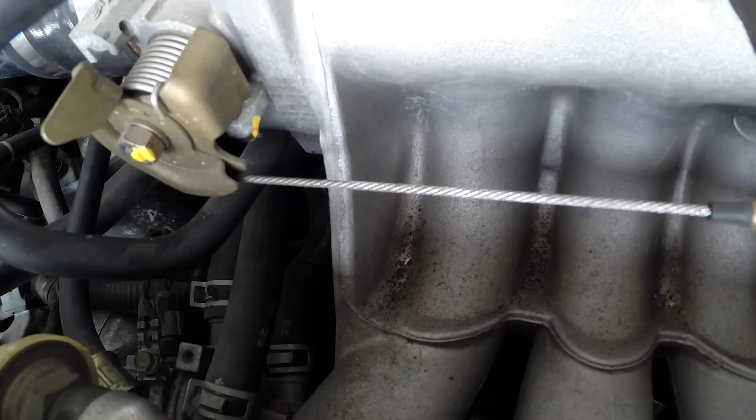In the last decade, over 95% of new vehicles have switched from traditional throttle cables to advanced drive-by-wire systems. Instead of a simple mechanical connection, your accelerator pedal now talks to your engine through a small but mighty device called the Accelerator Pedal Position sensor. Today, we're zoning in on this critical sensor that's crucial for your safety and engine's performance.

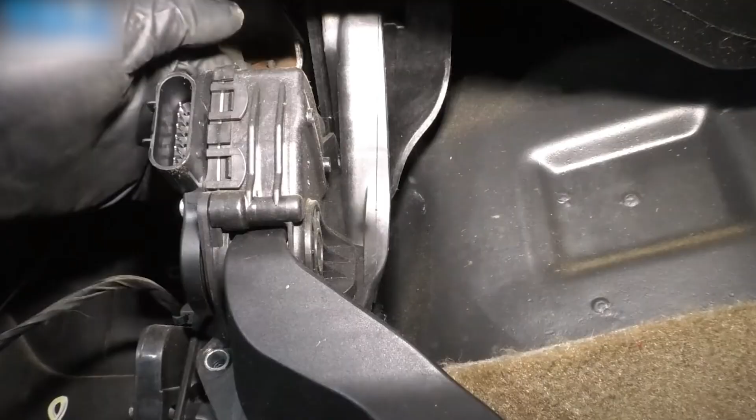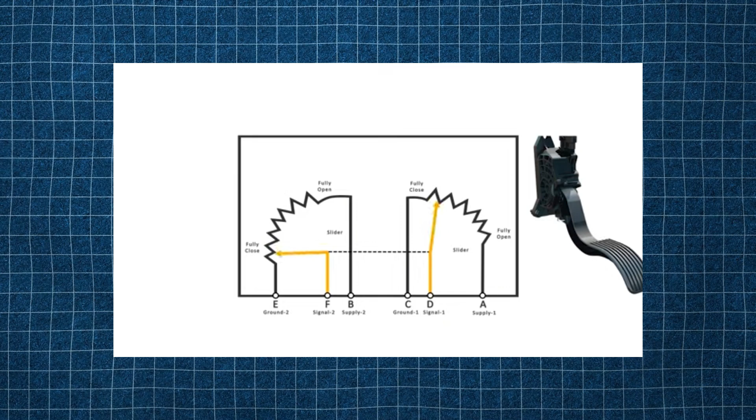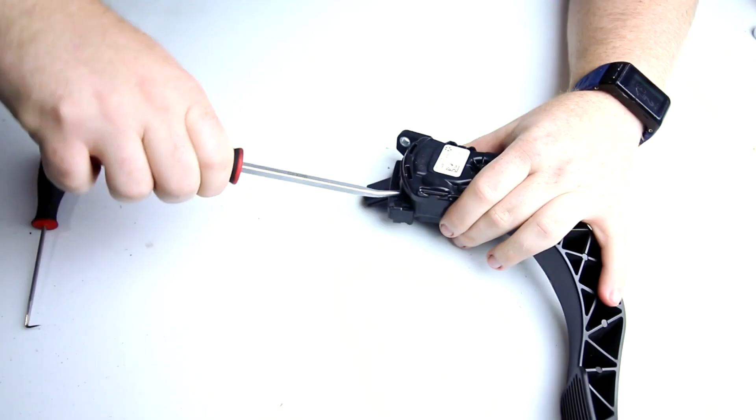What is the Accelerator Pedal Position sensor? The Accelerator Pedal Position sensor is a compact electronic component typically mounted on or near the accelerator pedal assembly. It contains internal circuits and sensors that detect the position and movement of the pedal. Built with precision electronics, it often includes one or more variable resistors, magnetic sensors, or Hall effect sensors inside a sealed housing designed to resist dust, moisture, and vibration. Most designs feature a multi-pin connector for electrical communication with the vehicle's control modules.

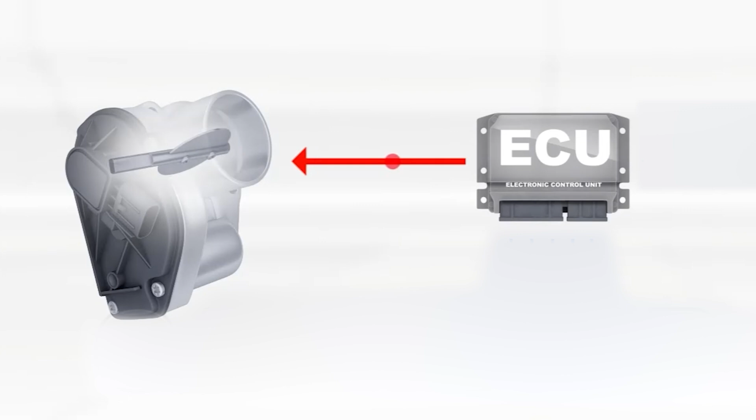What does the pedal position sensor do? The accelerator pedal position sensor measures how far the accelerator pedal is pressed and sends that information to the vehicle's electronic control unit, ECU. The ECU uses this data to adjust the throttle opening and control both engine power and fuel delivery, ensuring the right amount of air and fuel are supplied based on how much you want to accelerate.

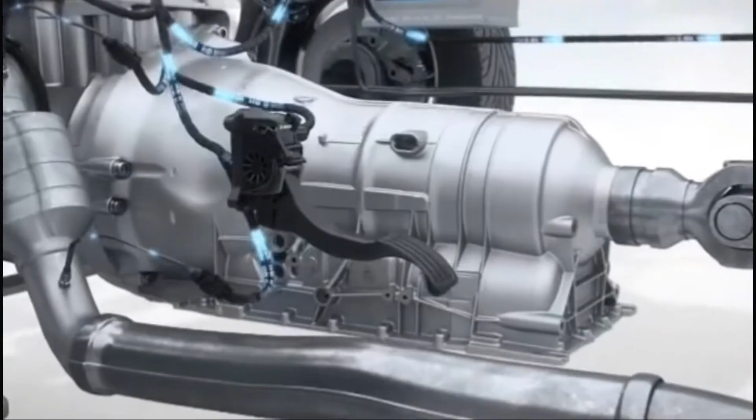But here's the kicker. When the accelerator pedal position sensor starts to fail, it might send inaccurate signals to your engine control unit, causing the engine to struggle to run properly or not run at all. Stick with me until the end to learn all the symptoms of a failing APP sensor and what to do.

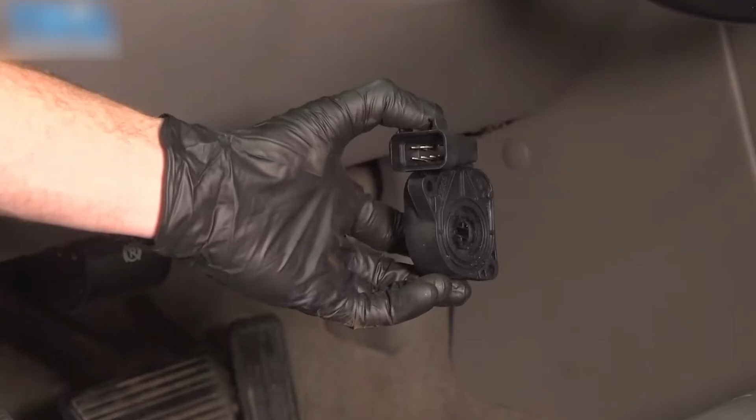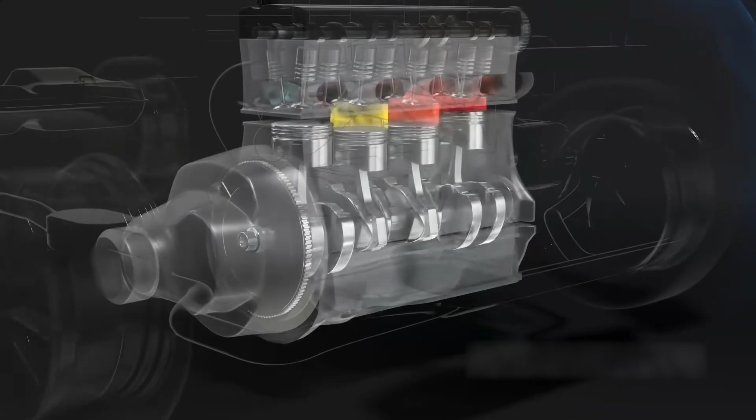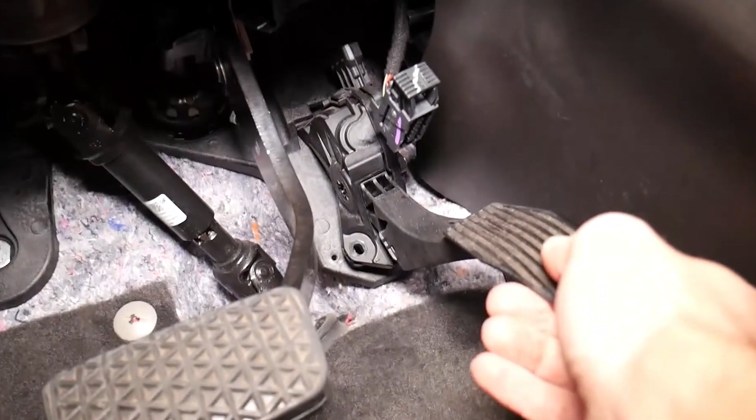1. Unresponsive acceleration. You press the pedal, but nothing happens, or there's a noticeable delay. An unresponsive accelerator is one of the most obvious signs of a failing pedal position sensor. The engine control unit, ECU, depends on precise readings from the sensor. If the signal is weak, erratic, or missing, the engine struggles to respond appropriately. In many cases, you might experience sudden hesitation before the car finally accelerates. This isn't just annoying, it can also be dangerous, especially when overtaking, merging into traffic, or crossing intersections. Always take delayed pedal response seriously.

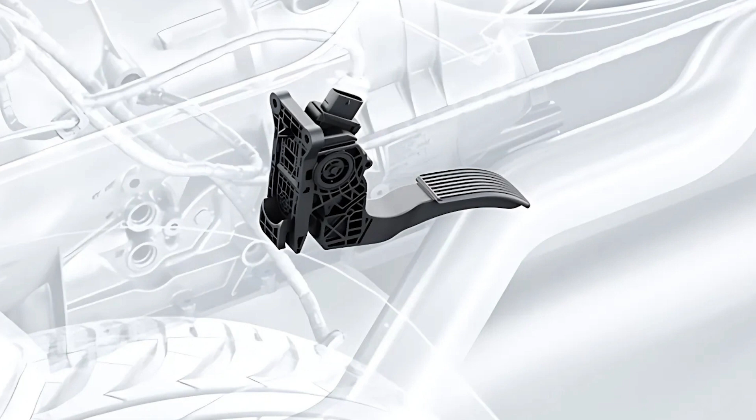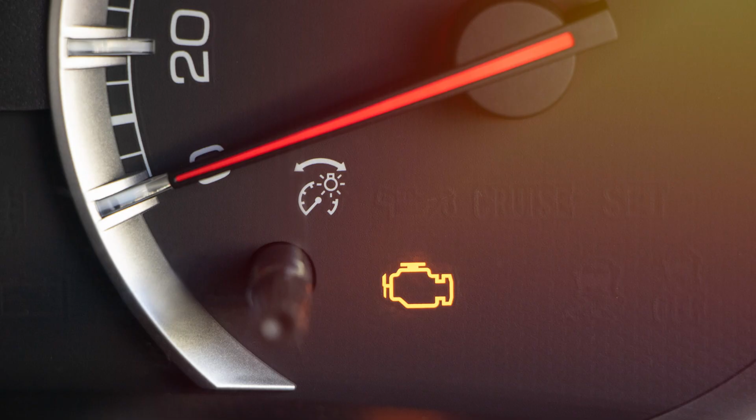2. Check engine light coming on. When something goes wrong electronically, the car's first line of defense is triggering the check engine light. A bad accelerator pedal position sensor often throws a code, alerting you that something isn't right under the hood. The specific trouble codes related to the APP sensor usually are P0120, throttle pedal position sensor A circuit malfunction, P0122, low voltage input, and P0123, high voltage input. Even if the car seems drivable, ignoring the warning light could lead to more expensive repairs down the road. Always check the codes with an OBD2 scanner.

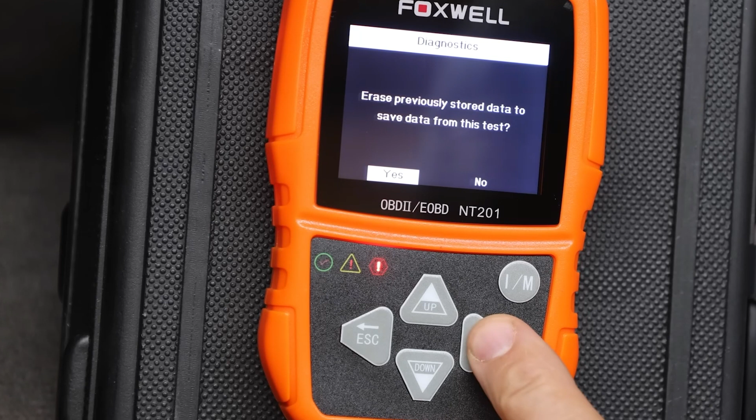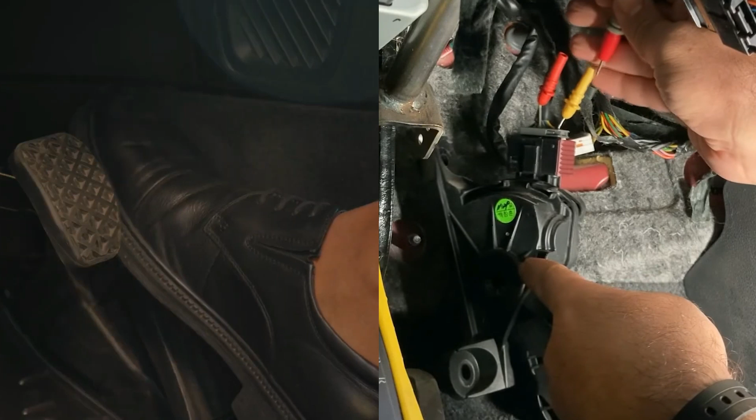3. No throttle response at all. In severe cases, the accelerator pedal may completely stop working. No matter how hard you press, the car doesn't move or only revs weakly in neutral, creating a potentially dangerous situation, especially in traffic or on highways. Complete failure usually means the sensor is either dead or its wiring has failed. This is an urgent problem that can leave you stranded, so it's important to have the car inspected immediately if you experience zero throttle response.

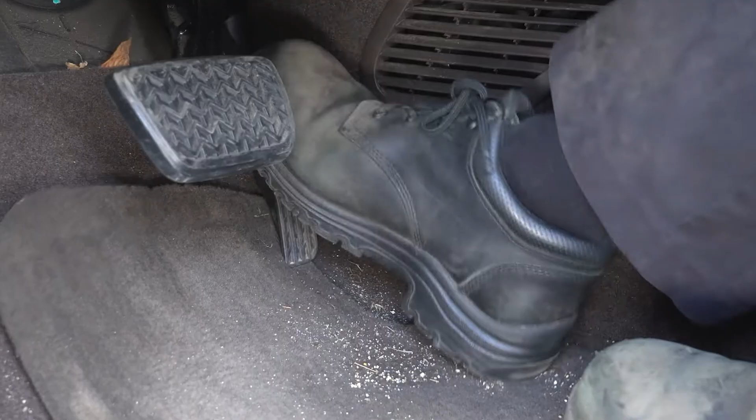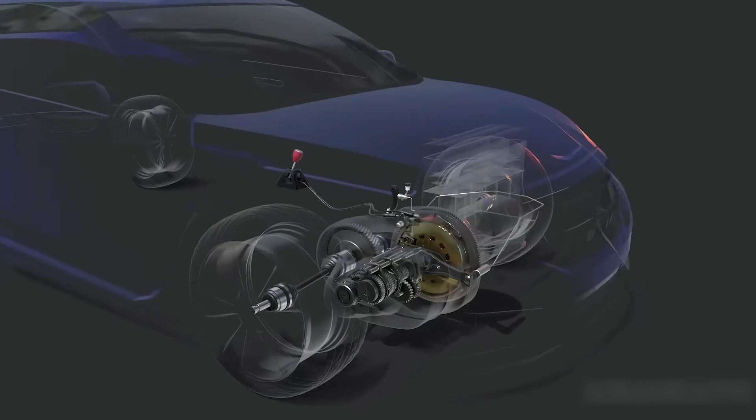4. Car goes into limp mode. Modern vehicles are equipped with protective features that activate when something critical fails. One such response is limp mode, triggered if the accelerator pedal position, APP sensor fails severely. Limp mode is designed to limit engine power, throttle response, and speed to reduce the risk of further mechanical or electronic damage. In limp mode, your car might not go faster than 20 to 30 miles per hour, and engine power will feel extremely limited. The throttle feels sluggish or almost unresponsive, and transmission shifts may also be restricted to protect the drivetrain. It's your vehicle's way of telling you that something is seriously wrong and needs immediate attention.

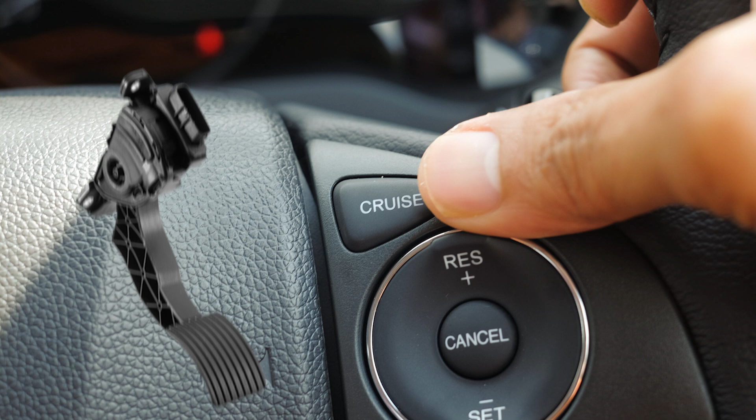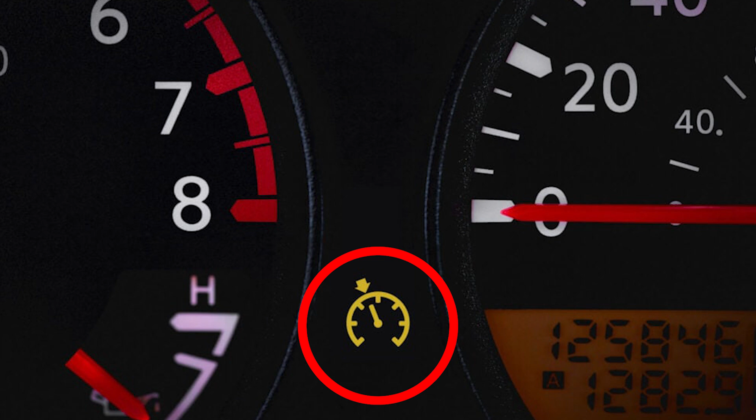5. Cruise control not working. Since cruise control relies on the APP sensor to maintain speed, a faulty sensor can disable the system entirely. You might press the set button, but the car won't hold speed because the ECU can't trust the pedal position data. Some vehicles may even flash a warning like cruise control disabled when the APP sensor fails. If your cruise control suddenly stops working, this sensor could be the reason.

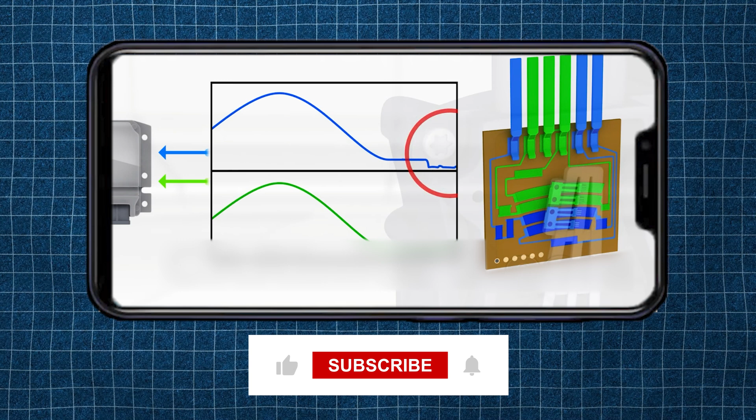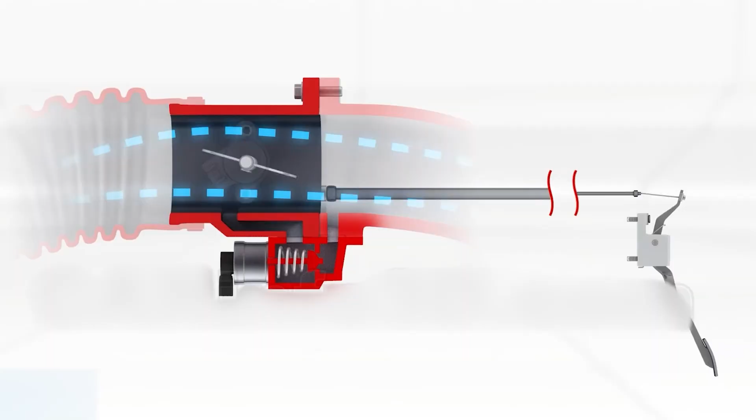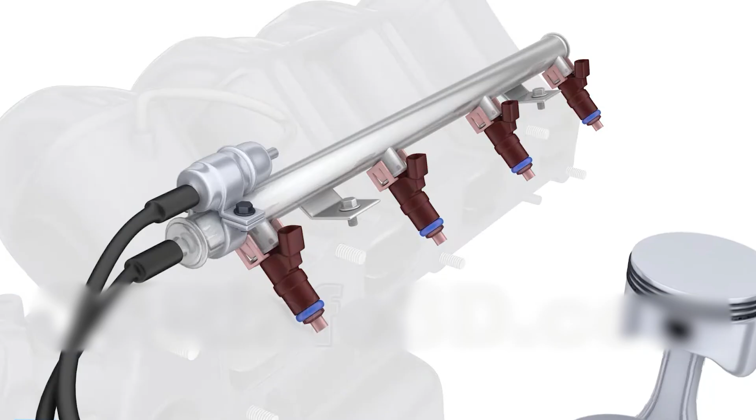6. Poor fuel economy. Since the APP sensor helps control fuel delivery, a bad sensor can cause your engine to burn more fuel than necessary. When the sensor provides faulty information, your ECU might think you're asking for more power than you are, leading to excess fuel injection. More fuel consumption means you'll visit the gas station more often and spend more money. Poor sensor feedback can trick your car into running rich even when it's not necessary, hurting both your wallet and the environment.

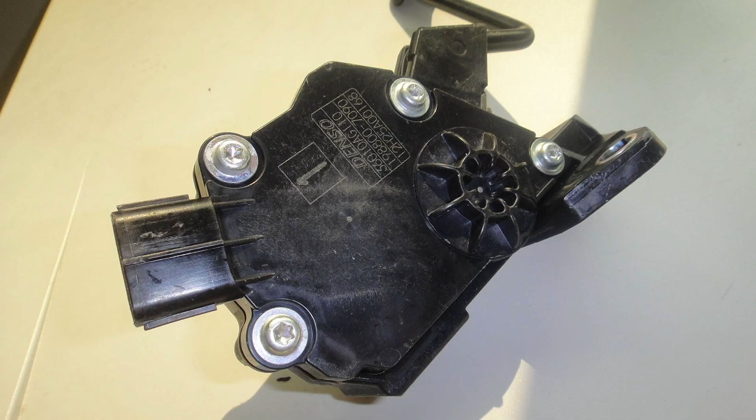7. Jerky acceleration. Smooth and steady acceleration is what we expect when driving. But a faulty pedal position sensor can cause your car to surge or jerk without warning.

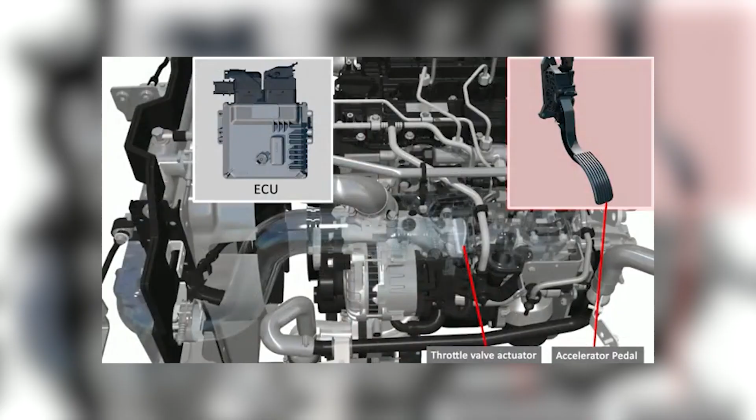Instead of a linear increase in speed, the car may speed up in bursts, even with consistent pedal pressure. This happens because the sensor's voltage output is inconsistent, sending confusing signals to the ECU. The computer tries to interpret the wrong data, resulting in sudden engine power changes. It can feel like your car is lurching forward unpredictably.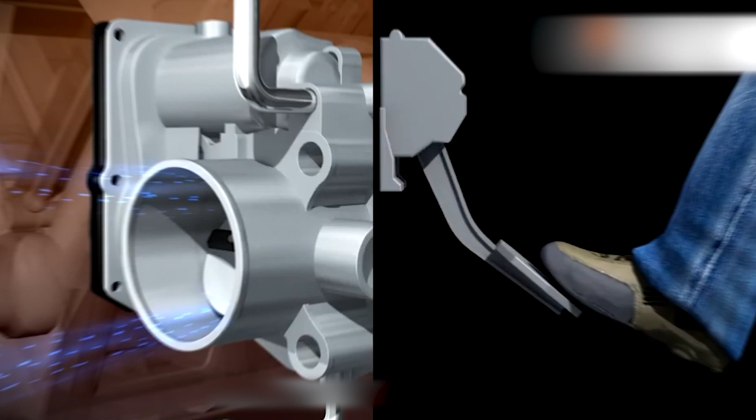8. Engine stalling. A bad accelerator pedal sensor can cause your engine to stall unexpectedly. Because the sensor helps regulate the air-fuel mixture via throttle input, incorrect readings can cause the engine to misfire or lose power completely. Sometimes, the engine might stall right after you press the gas pedal or while idling. This behavior is not only frustrating, but can leave you stranded if it happens at the wrong time. If you notice random stalls, the pedal sensor could be the hidden culprit.

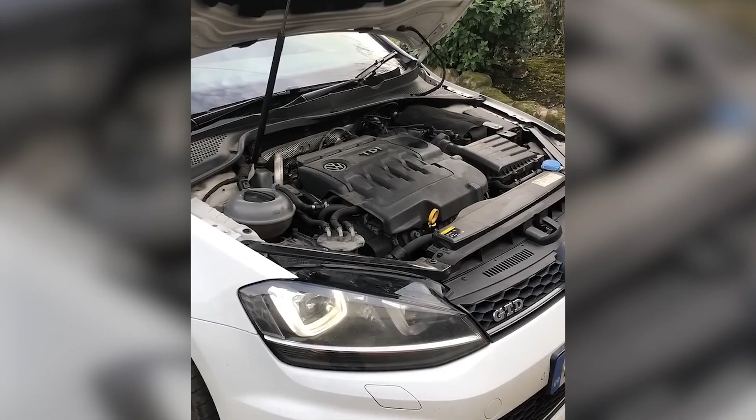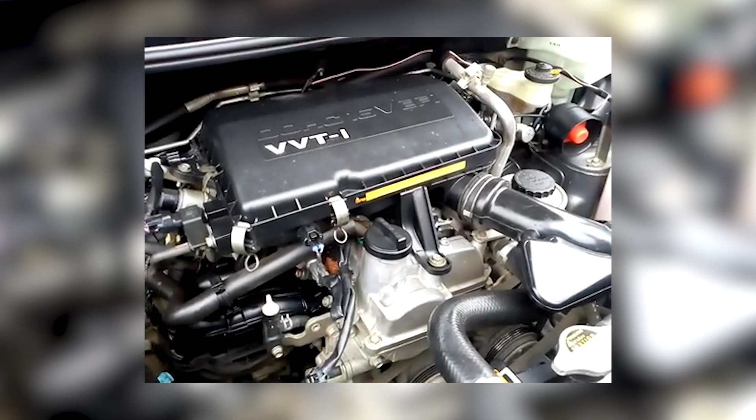9. Rough idling. When the accelerator pedal position sensor starts to fail, rough idling is a common side effect. You might notice the engine shaking or fluctuating when the car is stationary, such as at stoplights or in traffic. This happens because the ECU is receiving incorrect or inconsistent signals about throttle position, causing an unstable air-fuel mixture at idle. Rough idling may worsen over time and can lead to stalling if left unaddressed.

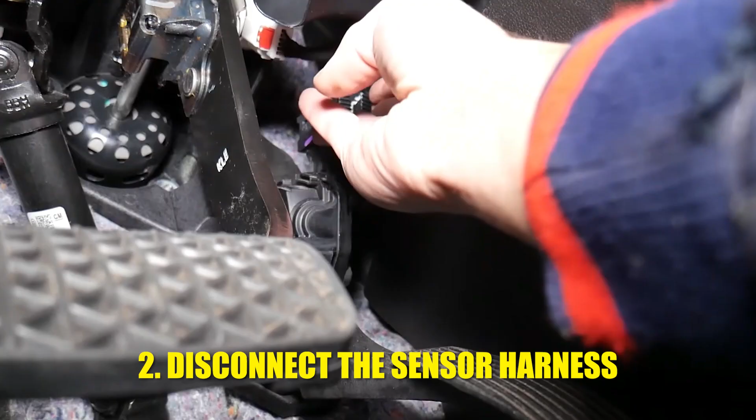How to test the accelerator pedal position sensor? Method 1. Using a multimeter. 1. Turn off the ignition and locate the accelerator pedal sensor connector. 2. Disconnect the sensor harness. 3. Set your multimeter to DC voltage. 4. Identify the sensor signal and ground wires using a wiring diagram. 5. Connect the multimeter's black lead to the ground wire and the red lead to the signal wire.

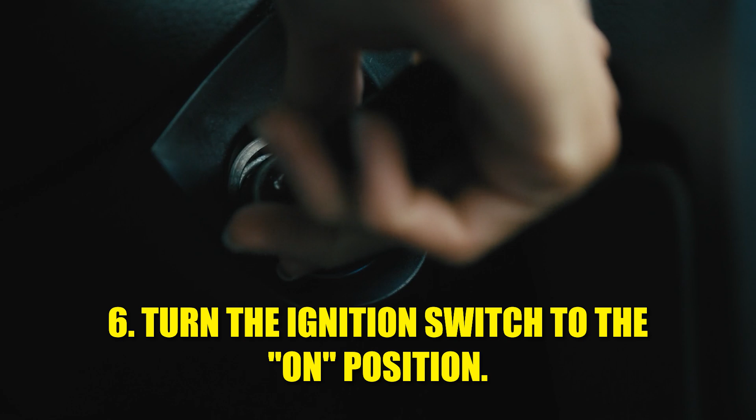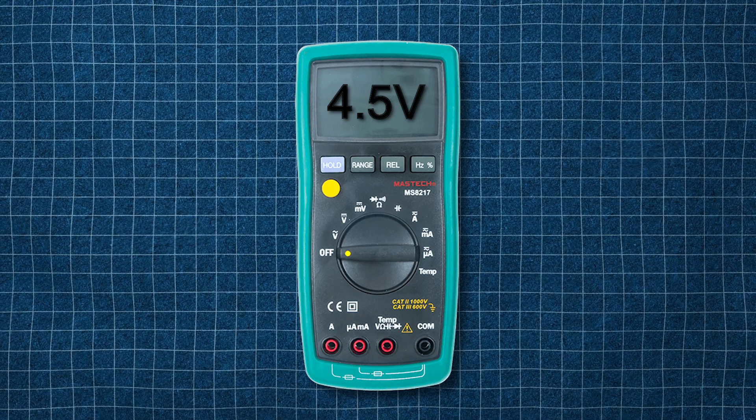6. Turn the ignition switch to the on position. Don't start the engine. 7. Slowly press the pedal and monitor the voltage. It should increase smoothly from about 0.5 volts to about 4.5 volts. Any sudden jumps, drops, or inconsistent readings indicate a faulty sensor.

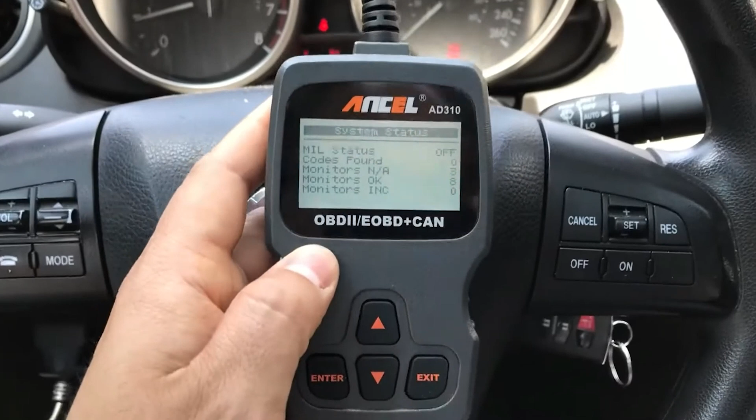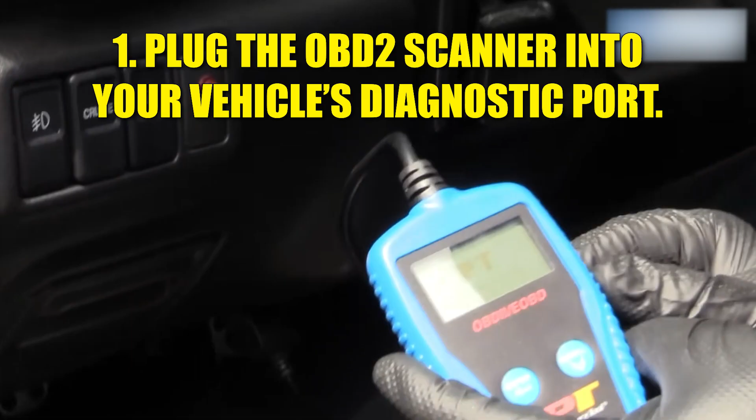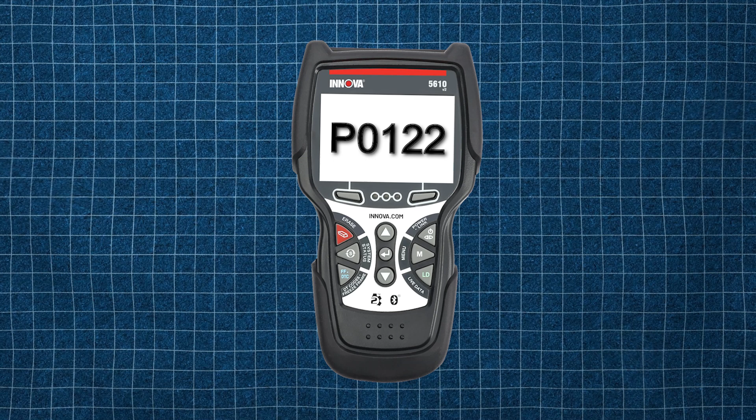Method 2. Using an OBD2 scanner. Using the OBD scanner, you will check for the live data and error codes. Below is the step-by-step process. 1. Plug the OBD2 scanner into your vehicle's diagnostic port. 2. Turn the ignition on without starting the engine. 3. Scan for trouble codes. The common APS-related trouble codes are P0120, P0122, P0123.

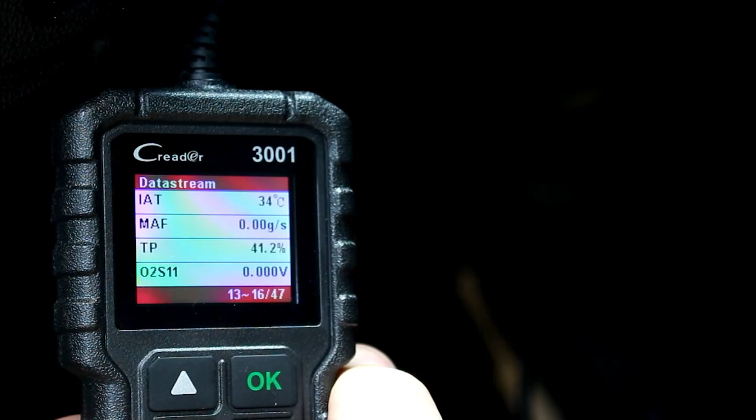4. Access the throttle or accelerator pedal position live data stream. 5. Gradually press the accelerator pedal while observing the data. The percentage value should increase smoothly from 0% to 100%. Jerky or inconsistent changes suggest a problem with the sensor.

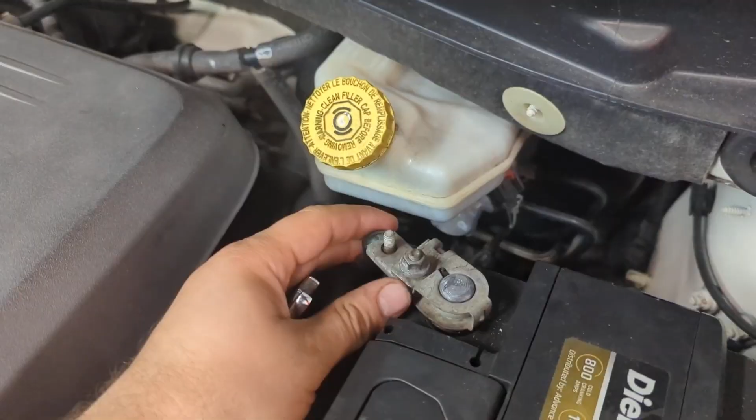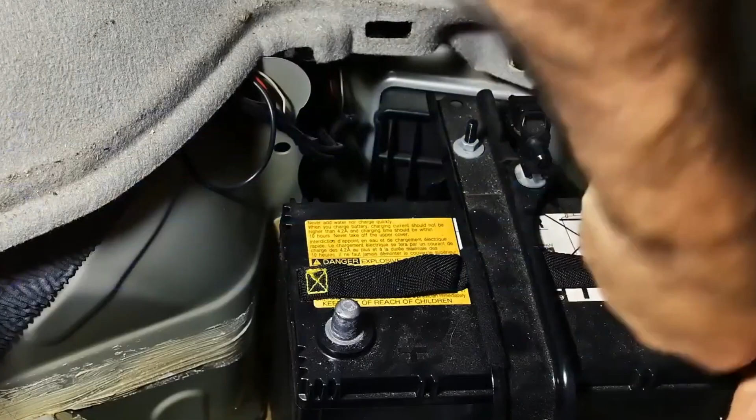Method 3, swap test. This method requires that you have a known good replacement APS sensor with the same part number as the suspected faulty sensor. Follow the simple process below. 1. Disconnect the battery as a safety precaution. 2. Remove the old APS by detaching any mounting bolts. 3. Install the new sensor and reconnect the wiring. 4. Reconnect the battery and start the engine. 5. Test drive. If symptoms disappear, the old sensor was bad.

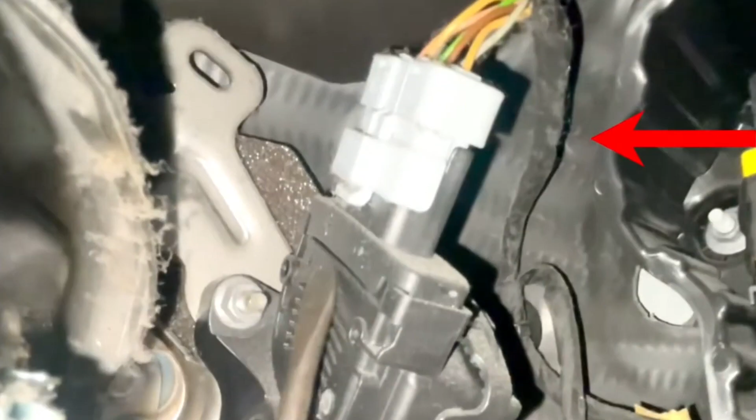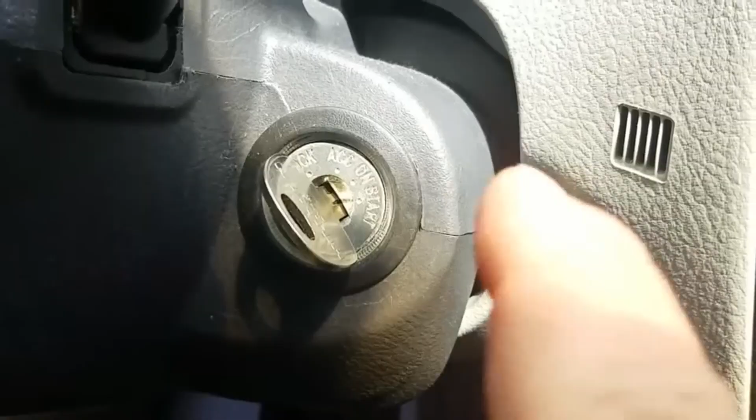How to fix an accelerator pedal position sensor. Fixing a bad accelerator pedal position sensor usually means replacing it. In most cars, the sensor is integrated with the pedal assembly, making it easier to replace both together. Step 1. As a safety precaution, disconnect the negative battery terminal to eliminate any risk of electrical shorts or accidental deployment of electronic components. Step 2. Carefully remove the sensor connector by pressing its release tab and detach any mounting bolts, usually 2 or 3, that are securing the pedal assembly in place.

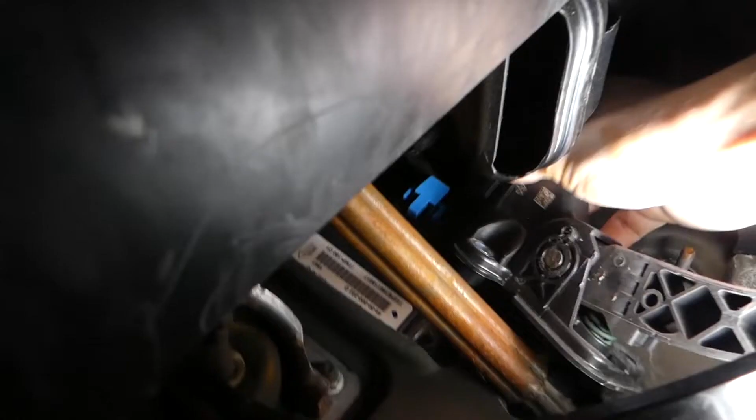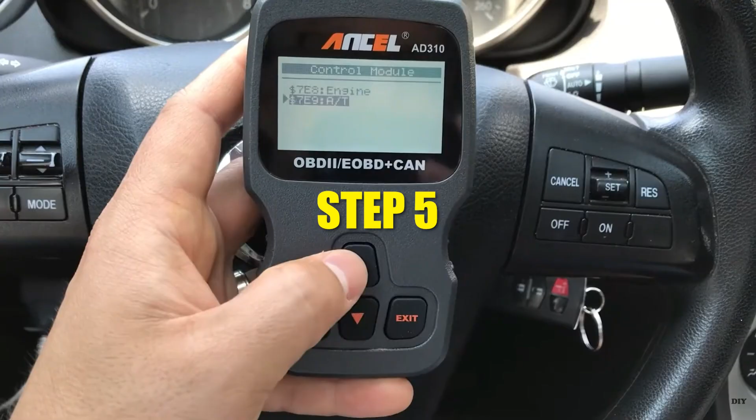Step 3. Install the new accelerator pedal position sensor by aligning it correctly and securing it firmly with the appropriate bolts, ensuring it matches your vehicle's specifications. Step 4. Reconnect the sensor's wiring harness securely and then reconnect the negative battery terminal to restore electrical power to the vehicle. Step 5. Use an OBD2 scanner to clear any stored error codes in the system, ensuring the vehicle's computer recognizes the new sensor. Step 6. Perform a thorough test drive, monitoring the vehicle's throttle response and overall behavior to confirm that the symptoms have disappeared and that the new sensor is functioning properly.

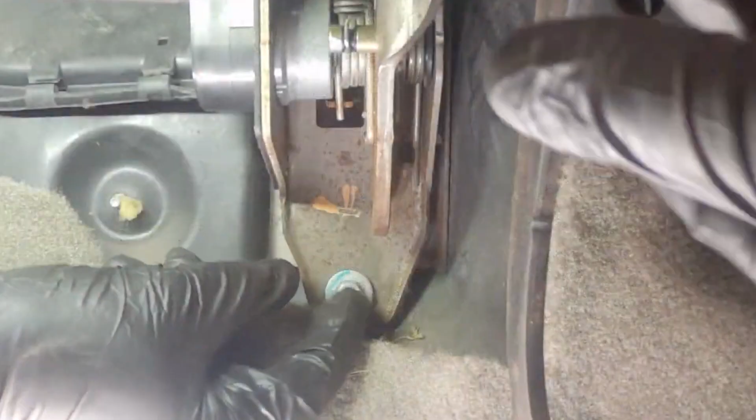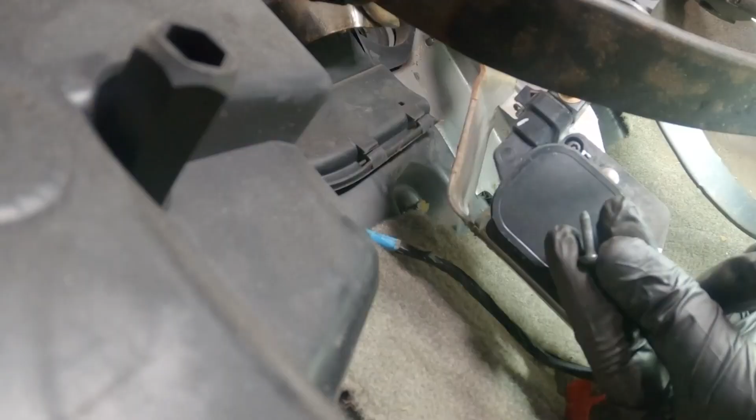How much does it cost to replace an accelerator pedal position sensor? The cost typically ranges from $100 to $300. Parts alone usually cost between $50 and $150, depending on the vehicle make and model. Labor costs add an additional $80 to $150, depending on your location and the shop's hourly rate. In many cases, because the sensor is often integrated with the pedal assembly, you may need to replace the entire unit, which can slightly increase the price.

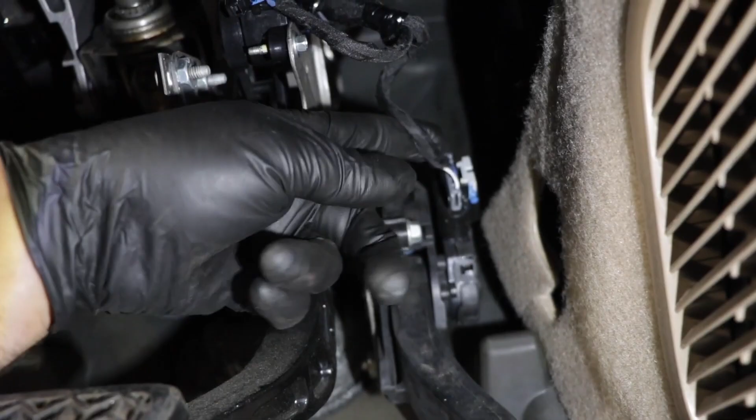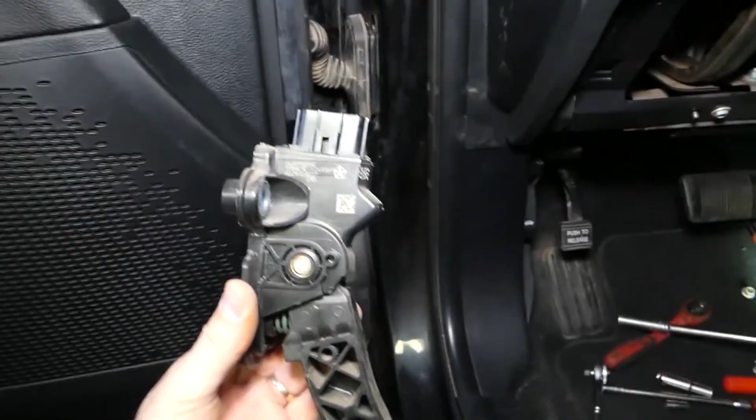How long does it take to replace an accelerator pedal position sensor? Replacing it at a mechanic's shop typically takes about 1 to 2 hours. The exact time can vary depending on the vehicle's make, model, and how accessible the sensor is, but a qualified mechanic can usually complete the job within that time frame without major complications.

We've just covered the symptoms of a bad accelerator pedal position sensor, the error codes, and how to test the sensor properly.